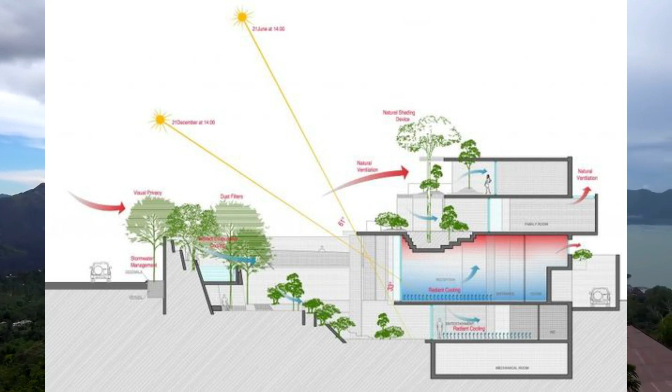Additionally, climatic design and architecture involves creating structures that harmonize with the local climate by considering factors such as temperature, wind, and sunlight, as you can see in this photo. Architects design buildings to optimize energy efficiency so we can save energy, enhance occupant comfort, especially in our home, and promote sustainability so that we care for our nature.

Examples include features like natural ventilation, cross ventilation, shading devices, and use of materials that respond effectively to our climate, showcasing a thoughtful, environmentally conscious approach to architectural design.

Next, materials and construction. Sustainable and locally sourced materials are crucial for construction in the equatorial climate. Let's have an example from our nature, like bamboo. Bamboo is a popular choice due to its rapid growth. We can see bamboo everywhere, especially in forests. And bamboo is good for strength and versatile. Additionally, raised foundations help mitigate flooding during heavy rain. So that's the advantage of using bamboo.

Additionally, choosing the right material for building is really important. Picking materials that are strong and lasting. We use materials like concrete and steel because they can handle different weather and stay strong. Being eco-friendly: some materials like recycled steel or bamboo are good for the environment.

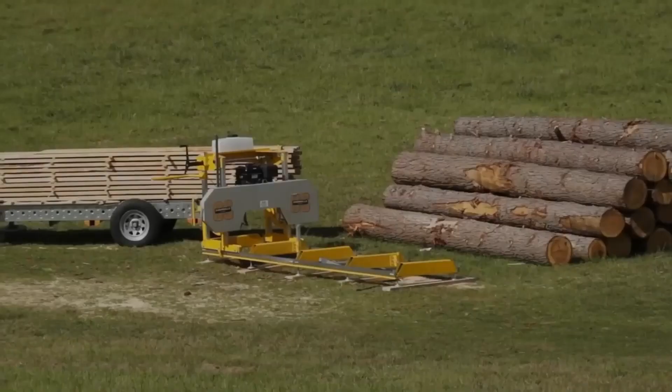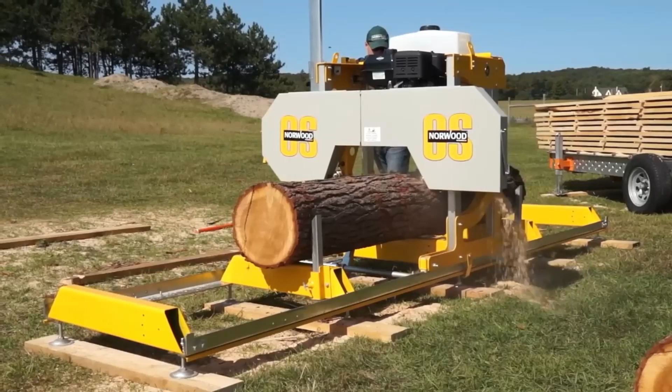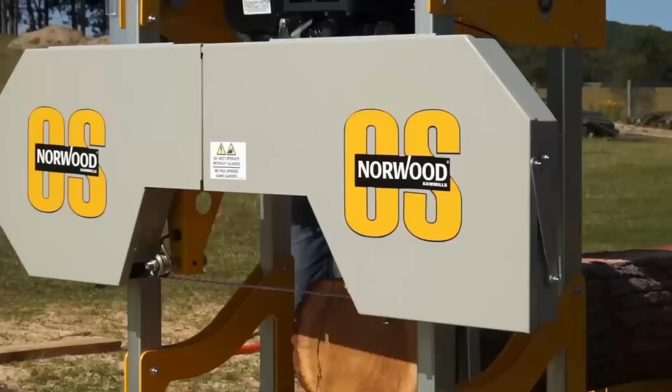We're trying to be more sustainable, especially we as architects. Keeping things warm and cool: materials that help keep our home at the right temperature are important, thinking about stuff like insulation to save money. Also, eco-friendly materials: trying to use materials that don't harm our environment.

Use of new technology. We're also using things like 3D printing to build things quickly and also save money. That's special to us, especially in our country. Making things look nice, or aesthetics, matches the plan. Choose materials that look good with the design we want. Colors and textures are important for how the building looks and its aesthetics.

And not too expensive. We use materials that are good and don't cost too much. It's about finding balance and aesthetics.

Green building practices. The equatorial regions are increasingly adopting green building practices, incorporating green roofs, living walls, and rainwater harvesting systems that contribute to environmental sustainability and promote energy efficiency. Also, focusing on creating structures that are environmentally friendly, resource efficient, and sustainable throughout their life cycle.

Sustainable materials: eco-friendly choices, materials with low environmental impact such as recycled, reclaimed, or rapidly renewable resources. Energy efficient materials: using materials that contribute to energy conservation, like high quality insulation or energy efficient windows. Also, implementing architectural design that maximizes natural lighting, reduces heat gain, and enhances energy efficiency.

Renewable energy sources: integrating solar panels, wind turbines, or other renewable energy systems to power buildings sustainably. Water conservation: efficient plumbing fixtures, installing water-saving fixtures and technologies to minimize water consumption. Rainwater harvesting: collecting and reusing rainwater for non-potable purposes like landscaping or flushing toilets.

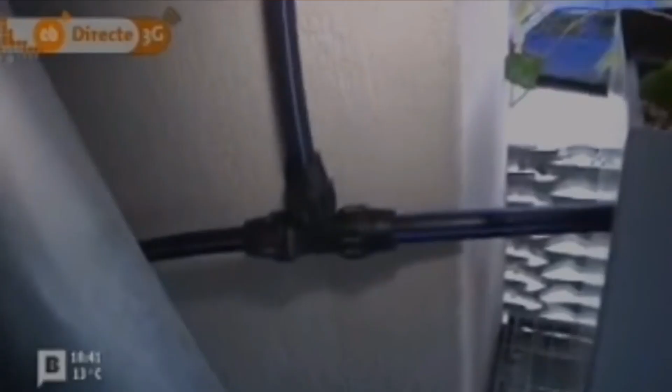Indoor air quality: ventilation systems, incorporating efficient ventilation systems to enhance indoor air quality and occupant well-being. Using materials with low volatile organic compound, or VOC, emissions to reduce indoor air pollution. Waste reduction: construction recycling, implementing strategies to recycle and reuse construction waste. Demolition practices: considering deconstruction instead of traditional demolition to reuse materials.

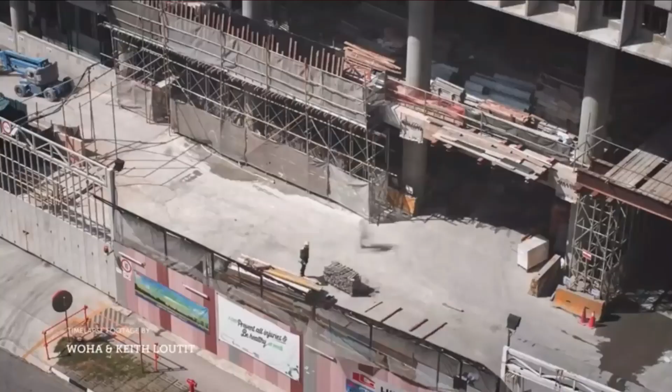Green certification: LEED and other standards, seeking certificates like Leadership in Energy and Environmental Design to ensure adherence to green building standards. Energy Star compliance: incorporating Energy Star rated appliances and equipment for improved energy efficiency so that we can save energy. Landscaping design: native plants, choosing locally adapted and drought-resistant plants to reduce water usage in landscaping. Green roofs: installing green roofs with vegetation to improve insulation, absorb rainwater, and enhance biodiversity.

Community and social consideration. Accessibility: designing buildings that are accessible to everyone, promoting inclusivity. Community engagement: involving the local community in the planning and development process for a more holistic approach. By incorporating these practices, architects and builders contribute to a more sustainable and resilient built environment.

Technologies and strategies. Passive cooling systems. Equatorial architecture emphasizes passive cooling strategies to reduce the reliance on energy-intensive air conditioning. Techniques such as cross ventilation, thermal mass, and reflective surfaces contribute to maintaining comfortable indoor temperatures. So as architects, we should not rely on artificial cooling systems like air conditioning, because such devices can contribute to pollution and can also raise electric bills.

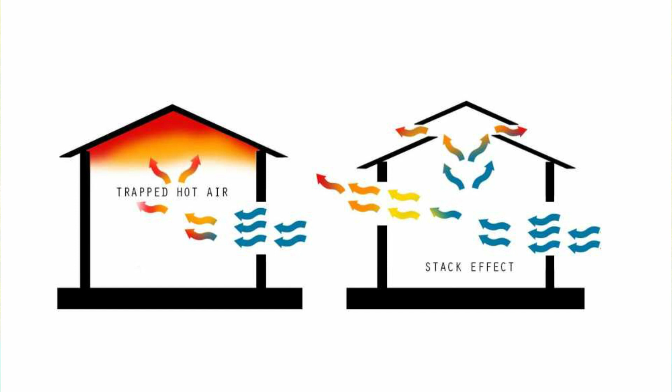Tropical climates present distinctive challenges with soaring temperatures and humidity. Given the energy-intensive nature of traditional air conditioning, architects turn to passive cooling as a sustainable alternative. A pivotal principle involves maximizing natural ventilation. Architects strategically position openings such as windows and vents to encourage cross ventilation, facilitating air movement and cooling indoor spaces.

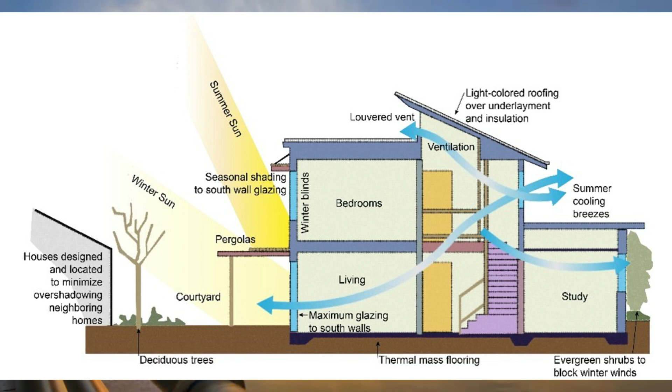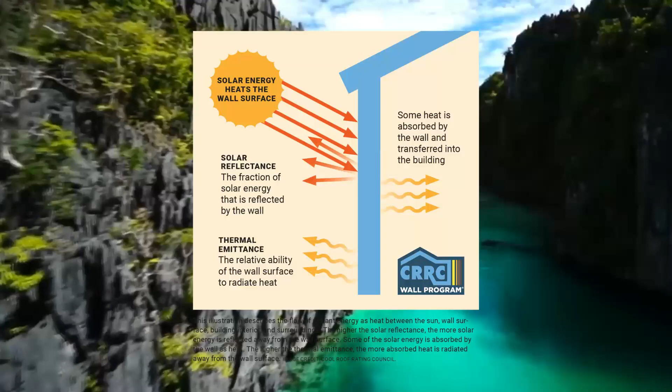Shading emerges as another critical element. Overhangs and louvers are strategically employed to shield buildings from direct sunlight, curbing heat gain and creating shaded spaces for occupants. Now, let's explore the concept of thermal mass. Materials with high thermal mass such as stone or concrete absorb and retain heat during the day, gradually releasing it at night to regulate indoor temperatures. Reflective surfaces also play a pivotal role. Light-colored materials on roofs and walls reflect sunlight, preventing excessive heat absorption and maintaining cooler interiors.

Passive cooling systems in tropical architecture embrace the inherent elements of nature to fashion comfortable living spaces. By integrating principles such as natural ventilation, shading, thermal mass, and reflective surfaces, architects not only mitigate environmental impact but also elevate the quality of life in these vibrant regions.

Renewable energy. With abundant sunlight, equatorial regions are ideal for harnessing solar energy. Solar panels are employed to generate electricity, and solar water heaters provide an eco-friendly solution for hot water needs. So in equatorial countries, we can use the sunlight to harness electricity, and it can also be used for hot water. So we can take advantage of the capabilities of an equatorial country for harnessing sunlight.

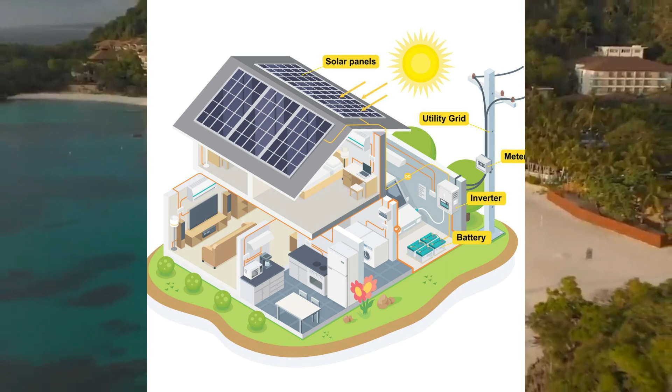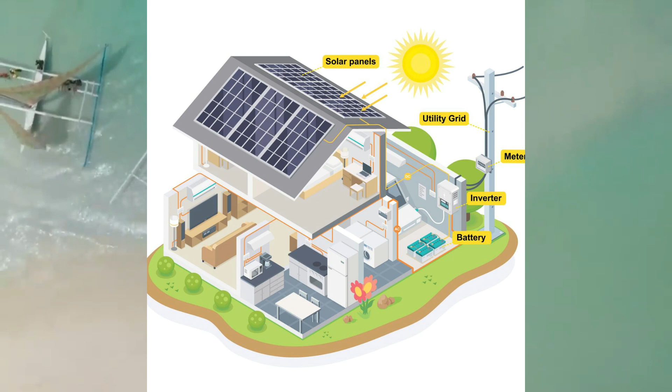Tropical areas are rich in renewable resources, with sunlight taking a prominent role. Solar power emerges as a pivotal player, providing a clean and ample energy source for tropical architectural solutions. Architects make use of the tropical sun by installing solar panels on rooftops and facades, converting sunlight into electricity and reducing dependence on traditional power sources. Another innovative approach is passive solar design. Architects strategically orient buildings and incorporate design elements such as large windows to maximize natural sunlight for lighting and heating purposes, minimizing reliance on artificial systems.

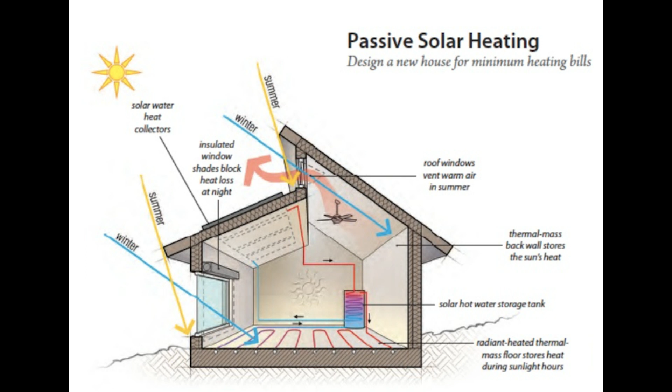Wind energy also plays a role in the tropical energy landscape. Architects investigate the potential of wind turbines, especially in coastal areas, to harness consistent and strong winds for electricity generation.

Moving beyond conventional renewables, sustainable landscaping gains prominence. Architects integrate green roofs and walls adorned with local vegetation, not just for aesthetics but also to provide insulation, reducing the energy needed for indoor cooling.

Renewable energy in tropical architecture is a vibrant and evolving field. By tapping into the abundant sunlight through solar technologies, exploring wind energy possibilities, and embracing sustainable landscaping, architects are shaping a greener narrative for the future of tropical living.

Water management. Given the consistent rainfall, management is crucial. Sustainable water harvesting and purification systems, coupled with efficient irrigation techniques, ensure a steady water supply without causing environmental degradation.

So, equatorial countries, tropical countries like the Philippines, are very prone to flooding because tropical countries, we know, are prone to intense rainfall and typhoons. So, water management is very crucial.

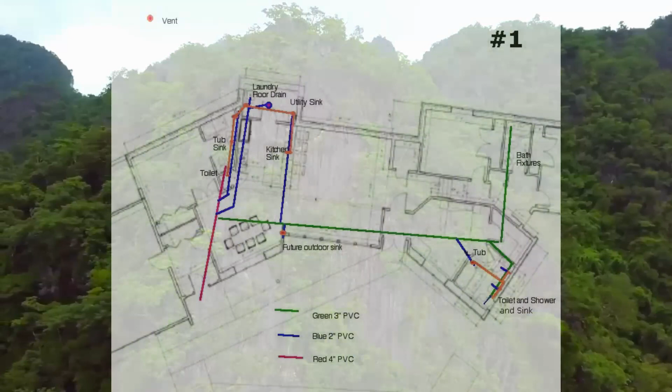Tropical regions often grapple with water-related challenges like heavy rainfall, floods, and periods of drought. Architects in these areas face the dual task of handling excess water during the rainy season and ensuring a stable water supply during dry spells.

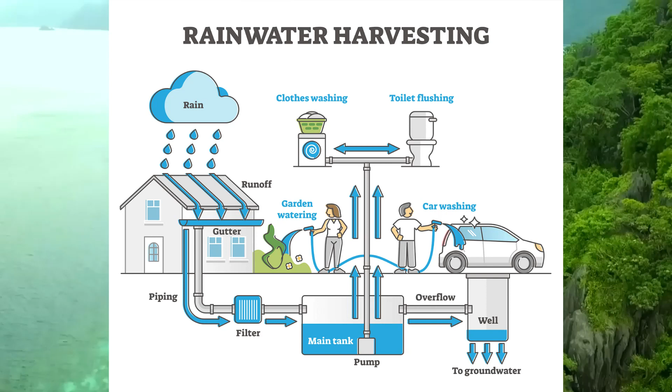A foundational approach to water management is rainwater harvesting. Architects design systems to capture and store rainwater, often through rooftop collection, providing a sustainable source for non-potable uses such as irrigation, toilet flushing, and even some potable purposes after proper treatment.

Sustainable drainage systems play a vital role. Architects implement permeable surfaces and green infrastructure to enhance water absorption, reducing surface runoff and the risk of flooding. This approach also aids in replenishing groundwater levels.

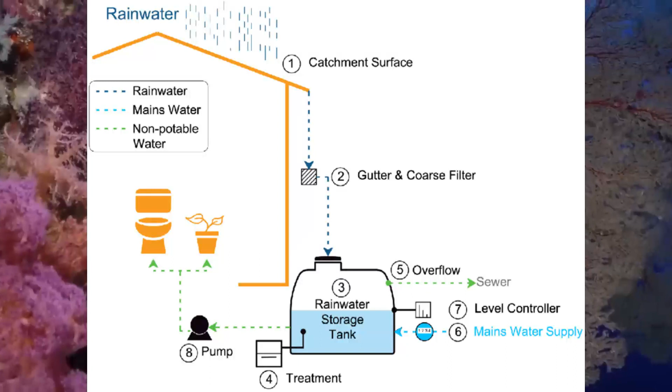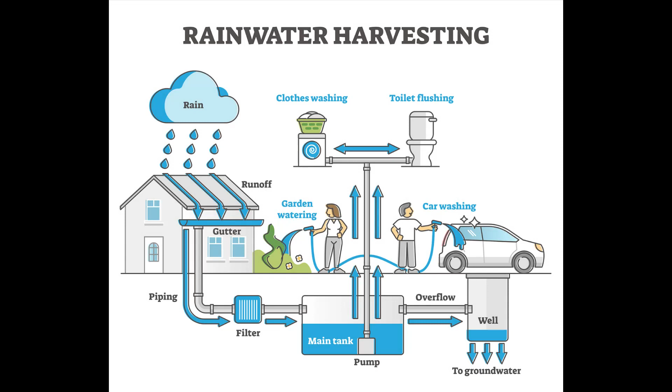Gray water recycling is gaining traction. Architects incorporate systems to treat and reuse water from sources like showers and sinks for non-potable purposes, reducing the demand on freshwater resources.

Addressing flooding concerns, architects use strategic planning and design to mitigate flood risks. This may involve elevating structures, creating effective drainage channels, and integrating green spaces that act as natural buffers.

During drought periods, architects turn to drought-resistant landscaping, using native and adapted plant species requiring less water. They create visually appealing and sustainable outdoor spaces that thrive even in water-scarce conditions.

A holistic approach includes incorporating water-efficient appliances and fixtures. Architects specify low-flow faucets, water-saving toilets, and energy-efficient washing machines to reduce overall water consumption within buildings.

Beyond infrastructure, community engagement and education are crucial. Architects collaborate with local communities to raise awareness about water conservation practices, encouraging responsible water use and fostering a collective sense of stewardship.

For tropical regions with coastal areas, architects address saltwater intrusion concerns. This involves strategic planning to protect freshwater sources from saltwater encroachment, ensuring a sustainable supply for urban and rural communities.